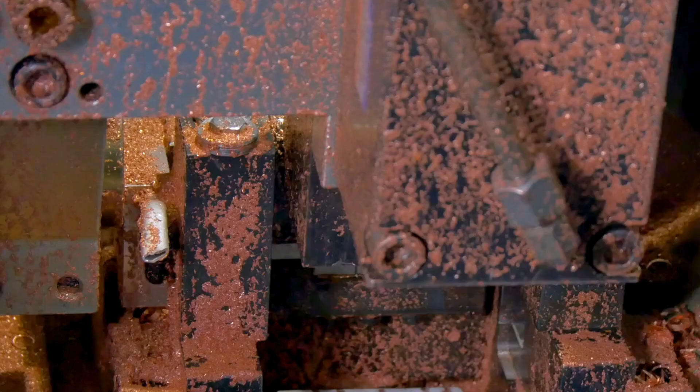What is a four-bend saddle? A four-bend saddle is a pipe bending technique used to navigate around the obstruction. It consists of four distinct bends that elevate and return the pipe to its original direction, maintaining a straight flow path while avoiding

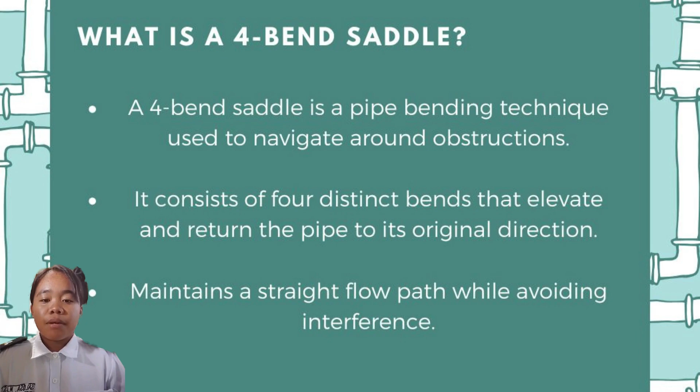Ayan, no? So, why should we use a four-bend saddle? So, una, to pass over obstacles like beams, pipes, or conduits. A four-bend saddle is specifically designed to help pipes or conduits navigate around barriers without interrupting the overall flow or yung structure ng pipes. This is useful in building infrastructures where pipes need to route around existing elements like beams or mga iba pang mga nakaharang na hindi pwedeng alisan.

Pangalawa, prevents the need for additional fittings or connectors. By using bends, the four-bend saddle eliminates the need for extra connectors such as elbows, joints, at yung mga couplings. This not only reduces the material cost, but also minimizes potential leak points and installation time.

Pangatlo, minimizes flow resistance and preserves pipe integrity. Smooth bends result in less turbulence compared to sharp angles or fittings. This may help maintain optimal flow characteristics, important for fluid and electrical conduit systems, and it reduces stress points on the pipe, thereby extending its lifetime and performance reliability.

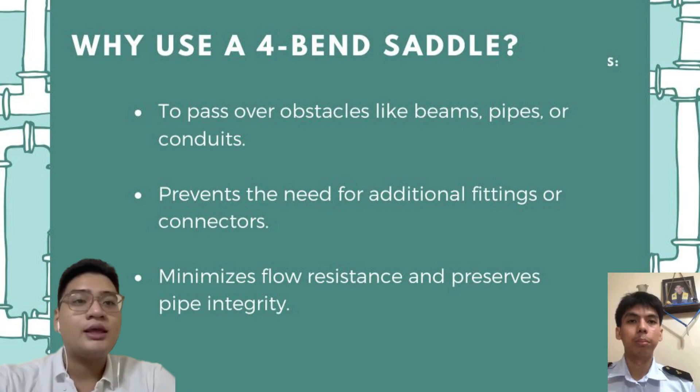Parts of the assigned pipe bender. A typical manual hand conduit bender consists of the following parts. Handle, a long metal tube used to apply leverage during bending. Bending shoe, head, the main body where the conduit rests. Includes measurement marks. Angle markings indicate standard bend degrees. Example, 10 degrees, 22.5 degrees, 30 degrees, 45 and 60 degrees.

Star point, a reference mark used for placing the center of a 90 degree bend. Arrow, start point, used to align the start of a bend. Rim notch, center of bend for back-to-back, used for accurate distance-based bending. Footrest, foot pedal, a part of the head used to apply downward force with your foot.

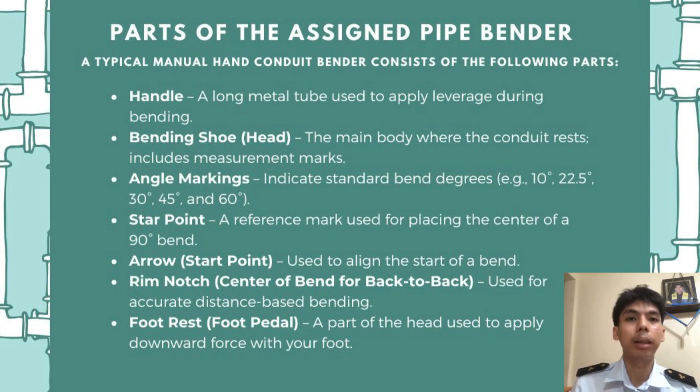So for the process on how to use the assigned pipe bender, first mark your measurements on the conduit using a marker and a measuring tape. So depending on the type of saddle bend, whether a 3-point or 4-point, measure the height and width of the obstruction as well as the distance between the bends for the obstruction. Then place the conduit in the bender, aligning the correct mark with the arrow or star point on the shoe.

Next is position the bender on the floor, placing one foot on the foot pedal to hold it steady. Then pull back on the handle, bending the conduit to the desired angle, typically using 22.5 degrees for each bend in a four-bend saddle. Next is check the angle with a level or protractor. Lastly, repeat the process for the remaining bends, ensuring the distances between bends are equal for symmetry.

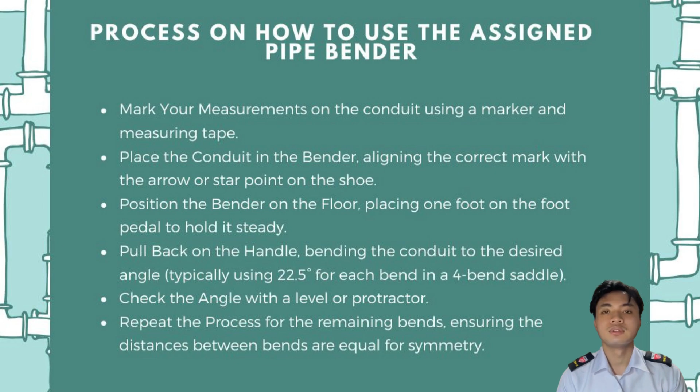So, choosing the saddle bend type you are using depends on the width or height of the obstacle and the space available for the bending. The next slide is about the process of making a four-bend saddle. First step, determine the obstruction height and its width. The second step is to choose the bend angle, commonly 22.5 degrees, for a low-profile saddle. The third step is use the saddle bend formula to calculate the offset length. Distance between bends: D equals H over tan theta, where theta is the bend angle.

After that, add another mark between each side and the center to form 4 evenly spaced bending points. Next step is mark the center point of the saddle directly above the obstruction. Next, mark 2 equal distances left and right from the center based on your calculated distance. And lastly, follow the bending order. Bend 1, outward bend, 22.5 degrees. Bend 2, inward bend, 45 degrees. Bend 3, inward bend, 45 degrees. And lastly, bend 4, outward bend again, 22.5 degrees.

And the overall conclusion on making a 4-bend saddle: we need to measure the obstruction, calculate the bend distance using D equals H over tan theta, and mark 4 bend points. Then follow the bend sequence 22.5 degrees out, 45 degrees in, 45 degrees in, 22.5 out for a proper saddle bend.

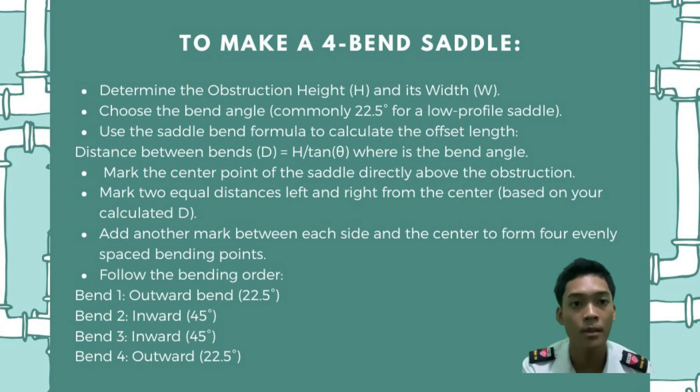When you are working around obstacles and need to create an accurate bend, it is essential to determine the correct spacing. For this, we use the formula D equals H over tan theta, where D is the distance between bends, H is the height of the obstacle, and theta is the bend angle. Commonly used bend angles are 22.5 degrees, 30 degrees, and 45 degrees.

Let's say that your obstacle is 4 cm high and you choose a 22.5 degree bend angle. Step by step, calculating the distance. First, distance equals 4 over tan 22.5, which equals 4 over 0.4142, and the distance is 9.65 cm. This 9.65 cm will be the reference distance from the center line of the obstacle.

First bend, center minus 1.5D equals 1.5 times 9.65 equals 14.5 cm. Second bend, center minus 0.5D equals 0.5 times 9.65 equals 4.8 cm. Third bend, center plus 0.5D equals 4.8 cm. Fourth bend, center plus 1.5D equals 14.5 cm. These marks tell you exactly where to bend your conduit.

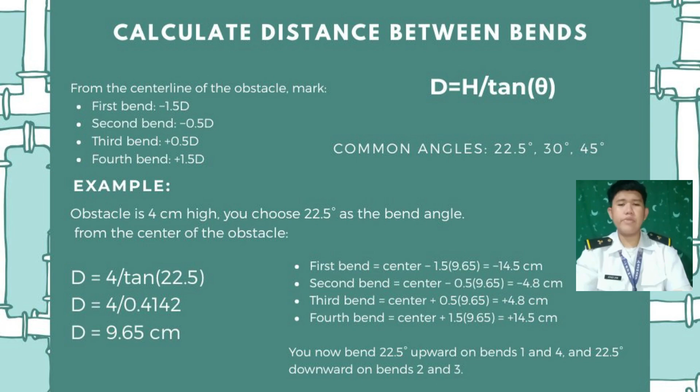Now, you bend 22.5 degrees upwards on bends 1 and 4 and 22.5 degrees downwards on bends 2 and 3. By following this method, you can make precise, professional bends every time. And always remember to double check your calculation and measure carefully. That's how you calculate the distance between bends using the tangent formula.

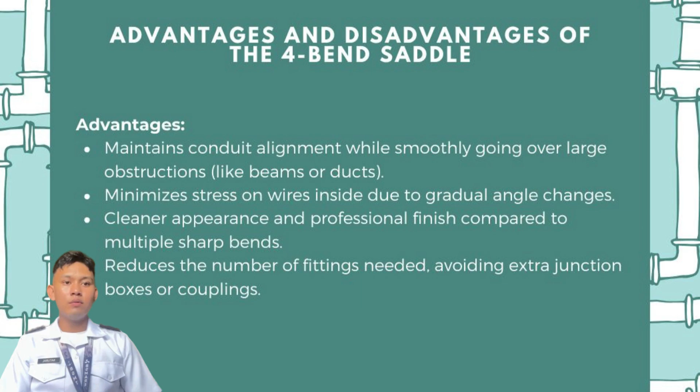Advantages and disadvantages of the 4-bend saddle. Advantage number 1, maintains conduit alignment while smoothly going over large obstructions like beams or ducts. 2, minimizes stress on wires inside due to gradual angle changes. 3, cleaner appearance and professional finish compared to multiple sharp bends. 4, reduces the number of fittings needed, avoiding extra junction boxes or couplings.

Disadvantages of the 4-bend saddle. First, requires precise measurement and bending for all 4 angles to be even. Second, more complex than simple bends like the 3-bend saddle, increasing chance of error. Third, consumes more conduit length, which affects material estimates. And lastly, not ideal for tight spaces where the extra bend length might be an issue.